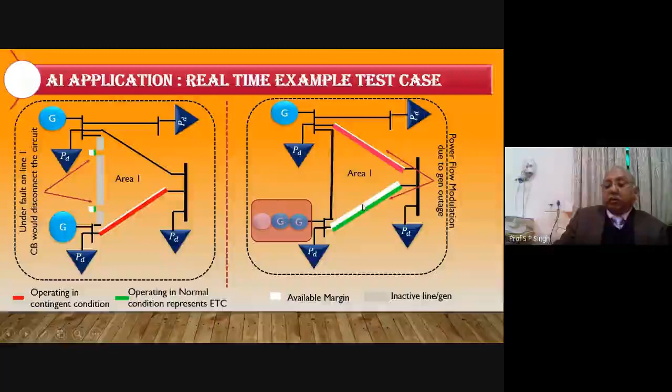Another example: at one of the nodes, the generator connected to this is a windmill whose speed will increase, feeding more power into the network, and this will also cause a change in the power carrying capacity of these lines.

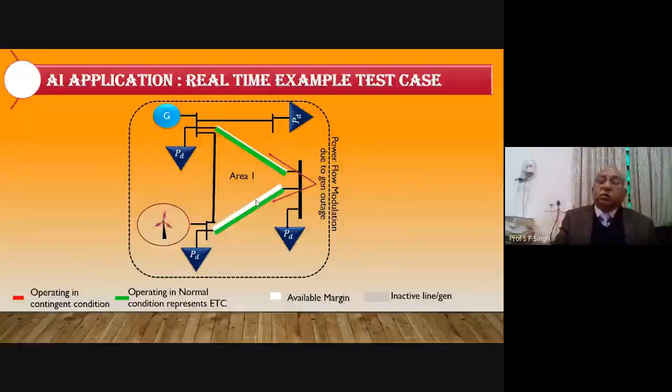And as the power fed by this generator is reduced, the power handling capacity of the lines will change.

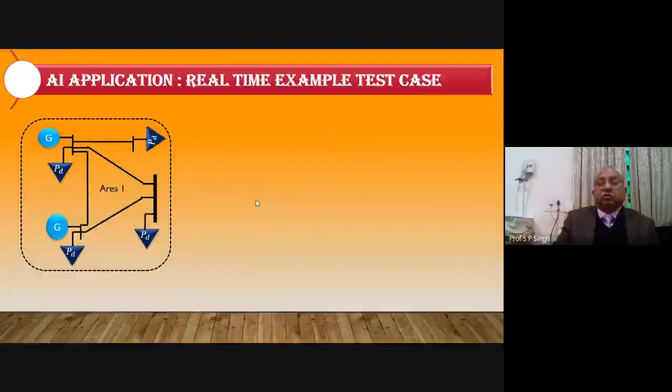This is another example of two areas, where these two areas are connected by two tie lines, and a fault in one of the lines will cause increase in power flow in the other line, leaving little margin for excess power to flow.

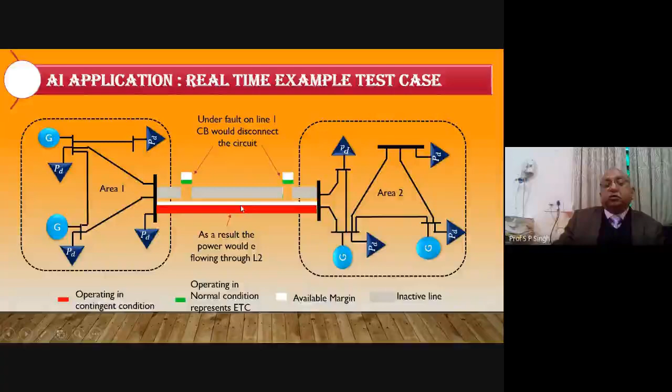So through these examples, I just tried to explain how the present scenario in the system changes, and in this changing scenario, depending upon the type of change, there may be increase or decrease in power due to faulty conditions, generator outage, or if we are using a renewable energy resource where power input goes on changing, toward the upper or lower side, and this will cause a change in power flow in various lines. The operator has to keep watch on this, and if it has to take up any additional load, maybe in a single area case or maybe in the double area case,

it will first decide whether there is enough margin to carry that load or not, and the electricity cost also may change depending upon the time, the capacity of the lines, and the demand of the consumer.

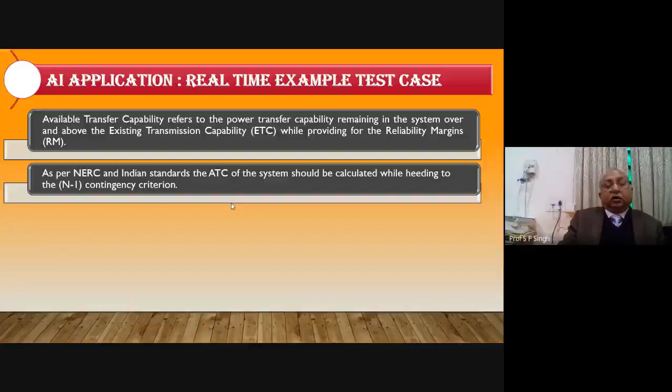This means while defining the ATC, it is considered that even with the power flowing according to the defined contingency, it can sustain an N-1 contingency. That means even if a line goes out, it will carry the amount of power calculated through the ATC evaluation or ATC calculation method.

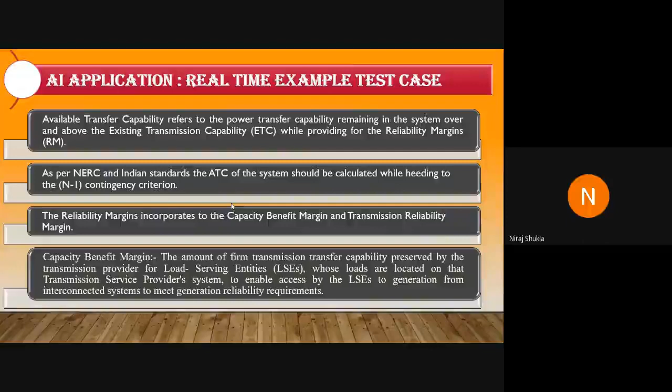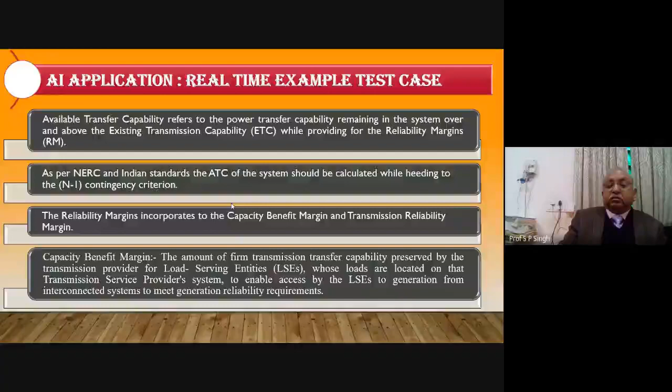The reliability margin incorporates the capacity benefit margin and transmission reliability margin. The capacity benefit margin is defined as the amount of firm transmission transfer capability preserved by the transmission provider for load serving entities, whose loads are located on that transmission service provider's system, to enable access by the LSEs to generation from the interconnected system to meet generation reliability requirements.

Transmission reliability margin is defined as the amount of transmission transfer capability necessary to provide reasonable assurance that the interconnected transmission network will be secure. The TRM, that is transmission reliability margin, accounts for inherent uncertainty in system condition and the need for operating flexibility to ensure reliable system operation as conditions change.

The existing transmission commitment, the first term which was used, includes any combination of native load uses, contingency reservations, the margin or capacity benefit margin, existing commitments for purchase, exchange, delivery, or sales, existing commitments for transmission service, and other pending potential uses of transfer capability.

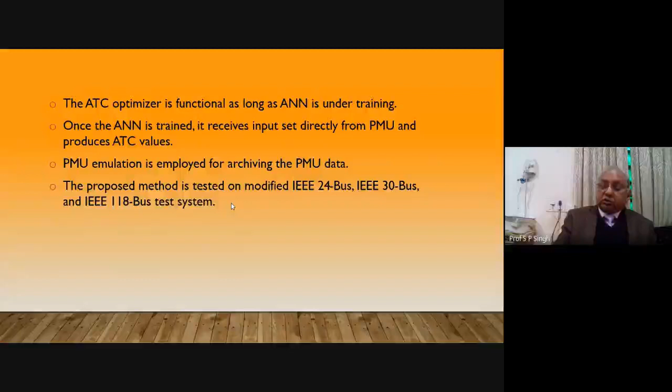The proposed method is tested on modified IEEE 24 bus, IEEE 30 bus, and IEEE 118 bus standard systems. The proposed method has also been implemented on a real-time digital simulator.

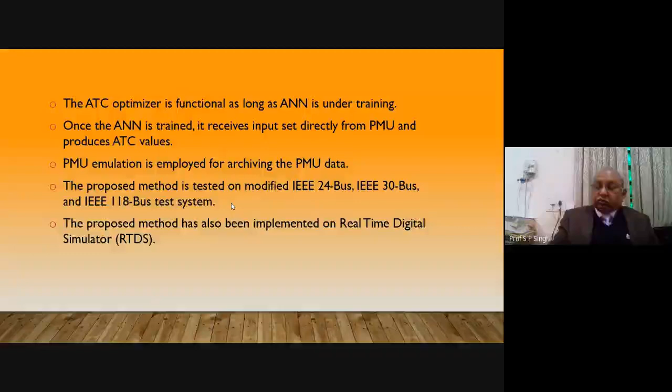A method for real-time estimation of ATC using measurement data from PMU. This is the expected outcome from the considered case study: a PMU emulator for obtaining the data required for training and testing of the ANN-based real-time estimator, and feature extraction for ATC estimation.

The feasibility of real-time applicability of the proposed method has been authenticated by implementation on RTDS.

ATC's definition has already been given: the power that could be delivered in addition to the existing transmission commitment, with due adherence to the transmission reliability margin and capacity benefit margin, has been defined as ATC.

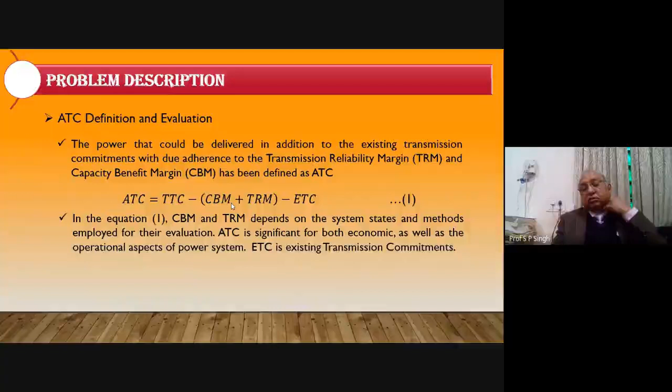ATC is significant for both the economic as well as operational aspects of the power system. The ETC is the existing transmission commitment; whenever you evaluate, the lines may be carrying some amount of power. So over and above whatever the system can carry, transmit, is the available transfer capability.

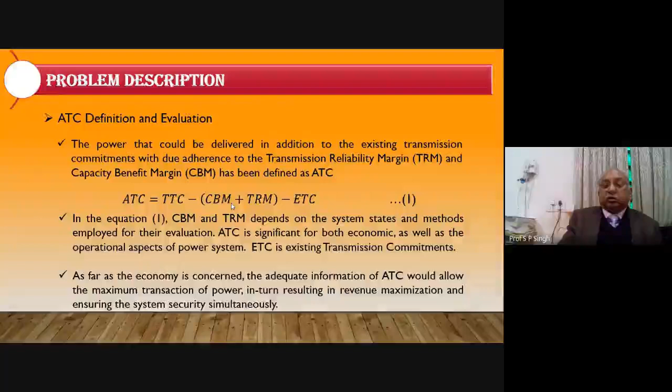As far as the economy is concerned, the adequate information of ATC would allow the maximum transaction of power, in turn resulting in revenue maximization and ensuring system security simultaneously.

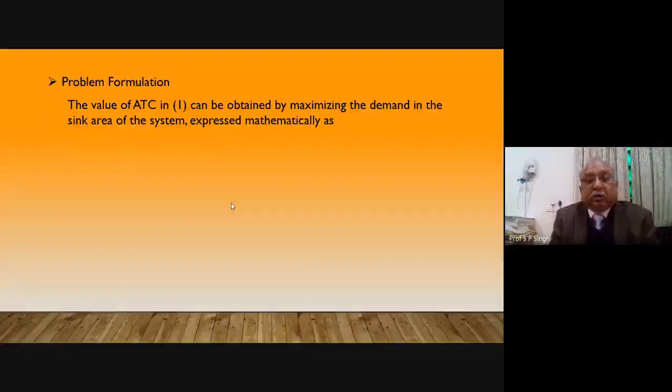The problem which we will attempt in future is formulated as: the value of ATC in equation 1, as already expressed, ATC equals TTC minus the two terms in the bracket minus ETC, can be obtained by maximizing the demand in the sink area of the system, expressed mathematically as follows.

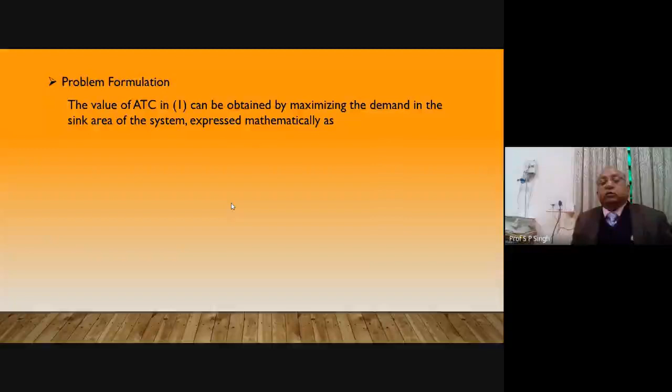F(x) equals the summation of Xi, with i varying from 1 to sink, that is load in the sink area, minus Xi0, that is the load in the beginning. This amounts to maximizing the amount of power that the system can carry, which is mathematically written as the difference between the sink area load in the beginning and during the period it functions. Here, sink is the number of buses in the sink area that take the load, Xi is the load at the ith bus, and Xi0 is the initial load, or base load, at the ith bus.

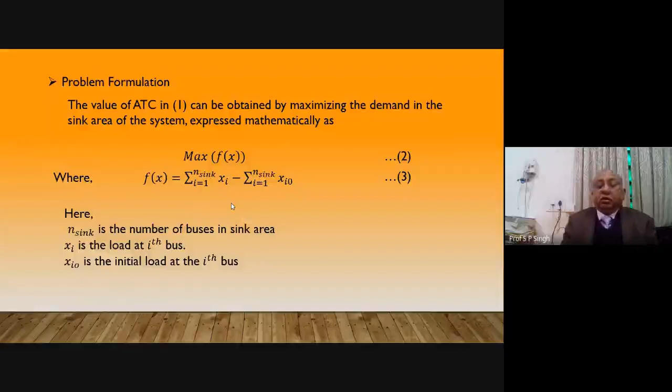The constraints include the equality constraint, that is power balance, where generation minus demand minus losses equals 0. That is about active power. Similarly, for the reactive power, generation minus demand minus losses.

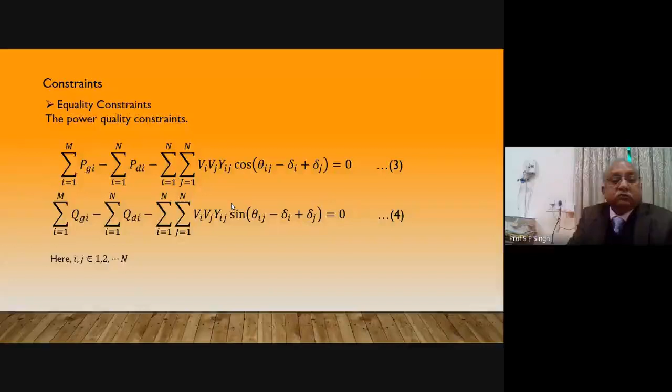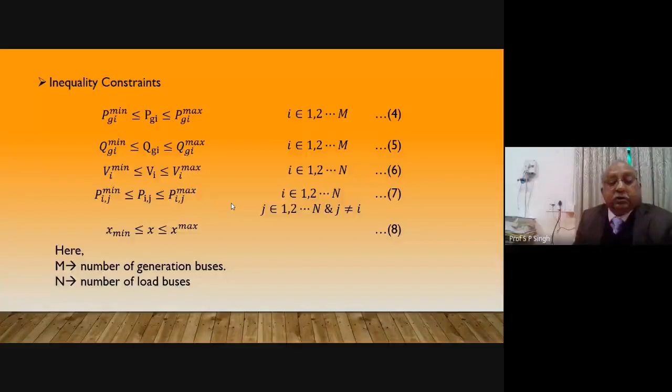Inequality constraints include: the generation at a generator bus should lie between its maximum and minimum limit that it can generate; similarly, the reactive power generation limits, voltage magnitude limits, line flow limits, and the load limits. M is the number of generator buses and N is the number of load buses.

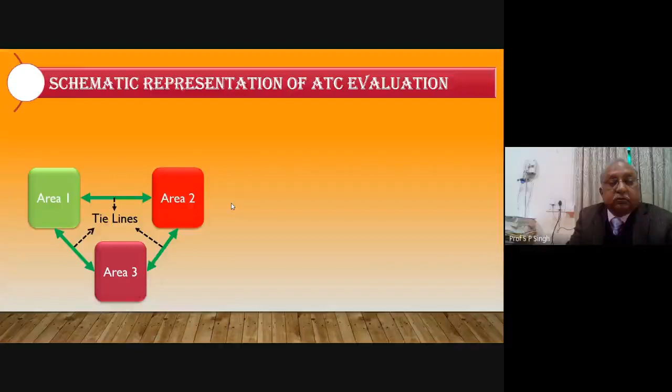Through three area, the power flow from one area to the other area are in general source to sink area is shown over here.

Similarly, when the source is toward the other side and sink is toward its opposite side.

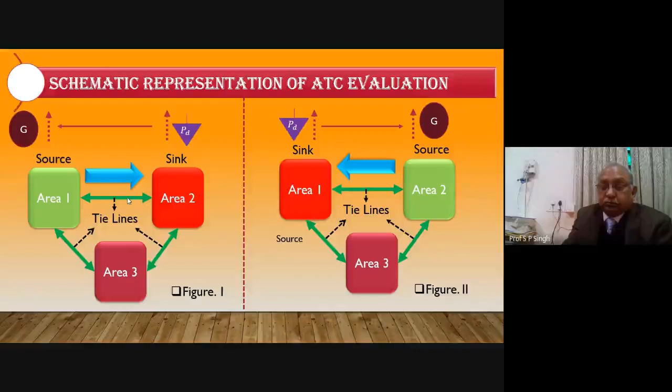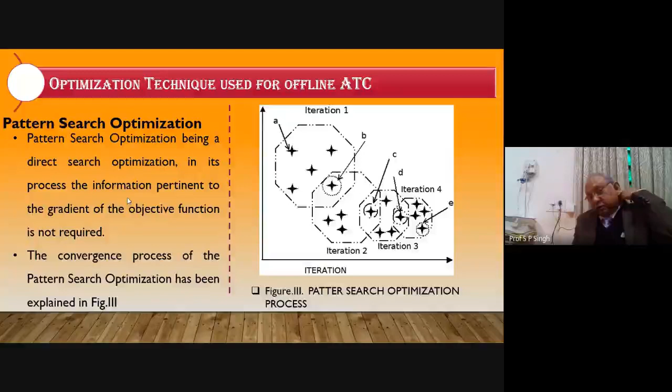This is the pattern search optimization technique which I told you in the beginning. So a lot of measurements are coming from the PMU, and if all are used for the training, it will take a huge amount of training time. To reduce that, the pattern search optimization technique has been used, which extracts the features on which the load depends, and the relation of ATC depends to the maximum extent. That's what was told in the beginning, that the pattern search optimization technique will also be used to sort out the features which strongly define the ATC.

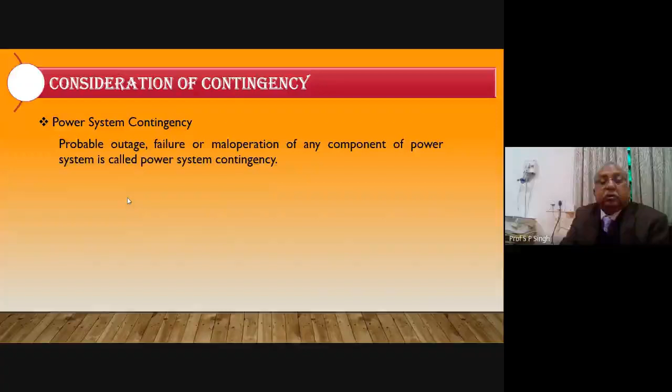Now, consideration of contingency: the probable outage, failure, or mal-operation of any component of power system is called power system contingency. The N-1 criterion for contingency analysis, which I told you that if one of the lines goes out and which line and all that will be tested by the contingency ranking.

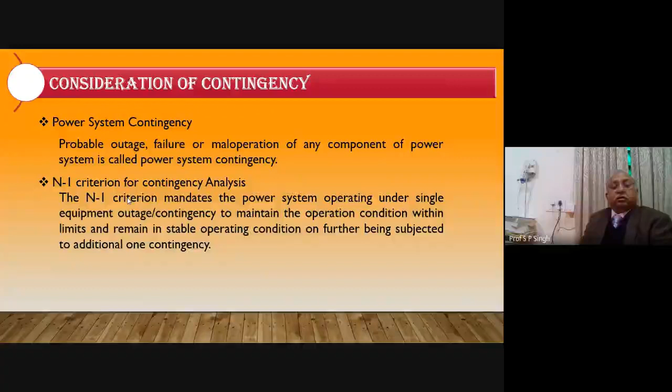So N-1 criterion for contingency analysis mandates the power system operating under single equipment contingency to maintain the operation condition within limits and maintains the stable operating conditions, further subjected to an additional one contingency.

Incorporation of contingency during ATC evaluation. To ensure proper operation, it is essential to consider the contingency while evaluating ATC of the system. So thus the ATC for any transaction is evaluated for any system such that in the event of the occurrence of the contingency, N-1 of the system remains within their operational limits.

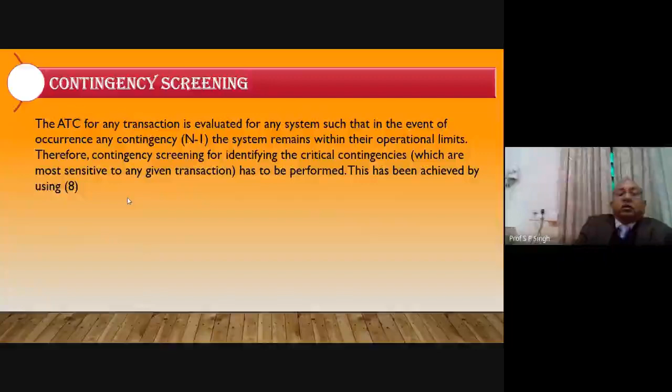All the contingencies are ranked in the priority order of priority or severity. Suppose a contingency is most severe based on its ranking, meaning if this contingency happens, the other contingencies will cause less severeness to the system. So if the system survives the most severe contingency, the operator knows it will definitely survive the others. As a result, contingency screening is done in the beginning and the system is studied for the most severe one. If it survives, there is no need of studying the effect of all the contingencies. That is what the screening means.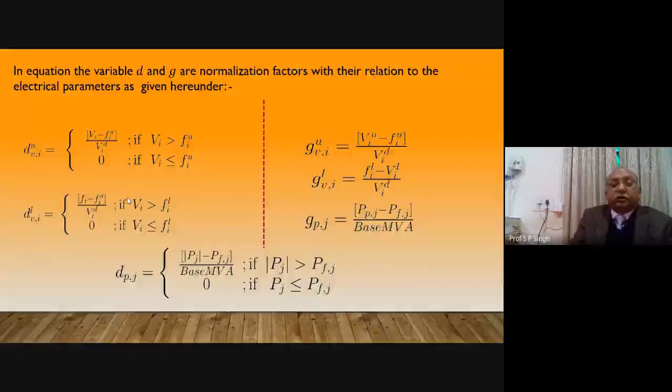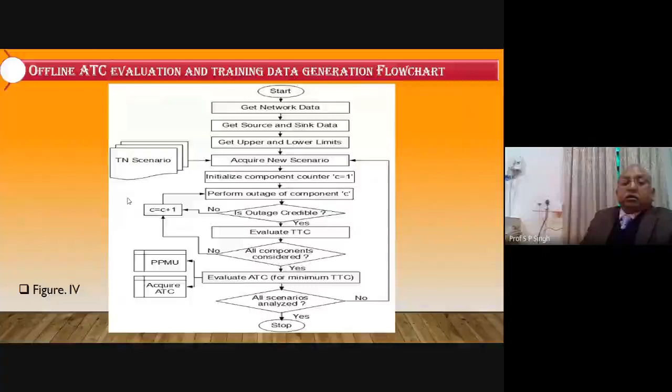Where the individual terms in the bracket are defined here, and the system and the line for which it is lower than the top one. So this ranking is obtained in the beginning before actually the contingency analysis is carried out, and this is to evaluate the contingency, taking care of all the cases.

The data of ATC for varying scenarios have been archived by the pseudo PMU emulator. Actually, the method used over here is a simulated PMU called the pseudo PMU emulator, for which the method has been developed by one of the PhD students, Mr. Devesh Shukla, and this work has already been published in IET GTD.

So now, the figure shows how the data is created for ATC evaluation, and the input data from the PMU emulator is obtained, and the network solver finds out the value of ATC using the formula which was explained earlier. So corresponding to all the scenarios using the relation which I told you has already been given over here, and its implementation in a flowchart manner is given in figure 4.

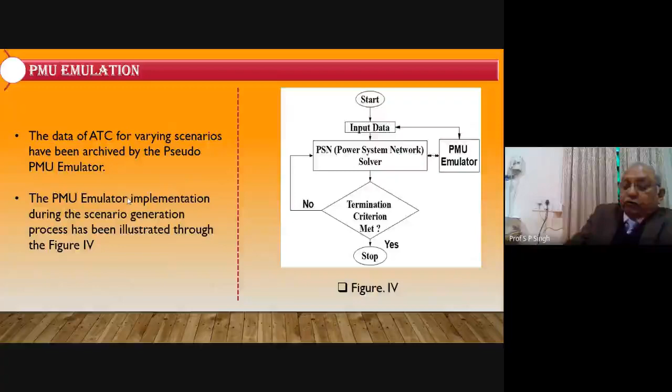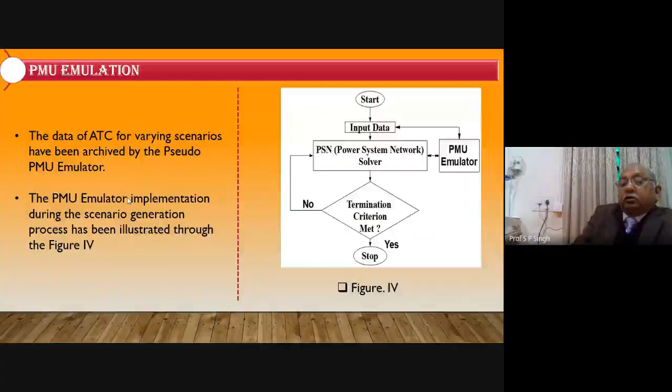So the information given to the PMU, or the input information to the network solver, is branch connectivity, voltage data, and the current data. And based on that, the current magnitude and its angle at the branch, and the voltage magnitude and angle, these information are obtained by PMU.

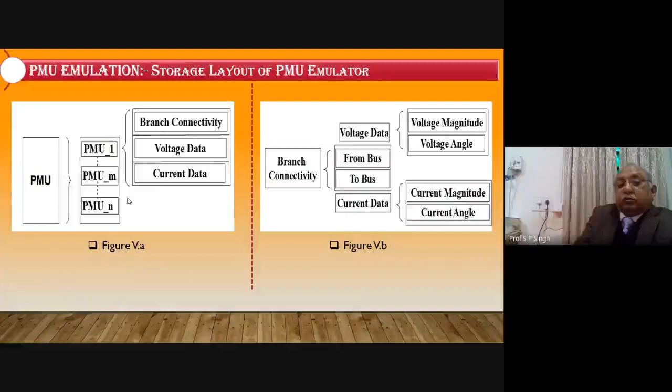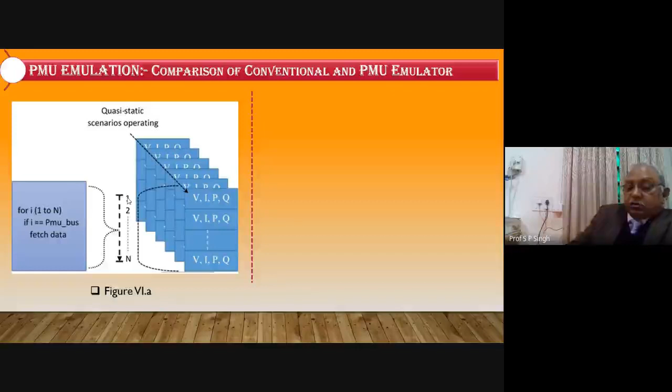And these are the information VIPQ, which is measured by PMU, is shown in the slide over here, for which the quasi-static operating scenario has been created, from which the PMU measurement is recorded, and using this PMU data, the neural network is trained.

Now to demonstrate that the pseudo PMU emulation and the actual power flow run using gradient technique, the time taken is same or more or less. You can see that the time taken by the PMU emulation is minimum compared to the gradient or iterative algorithm.

As far as speed is concerned, the PMU, that is pseudo PMU, has given faster results compared to any conventional technique. So one can adapt the PPMU based measurement. Linear state estimator has been used for the online application, which if I go into, we may not be able to complete the information, so I will discard it here.

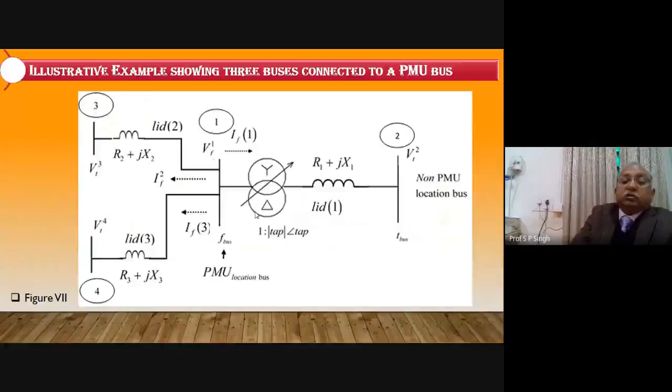This is the system actually used. Neural network has been used to train the network, and you may be knowing about the radial basis function network, where neurons are used in the hidden layer, one layer is the input layer, and linear neurons are used in the output layer.

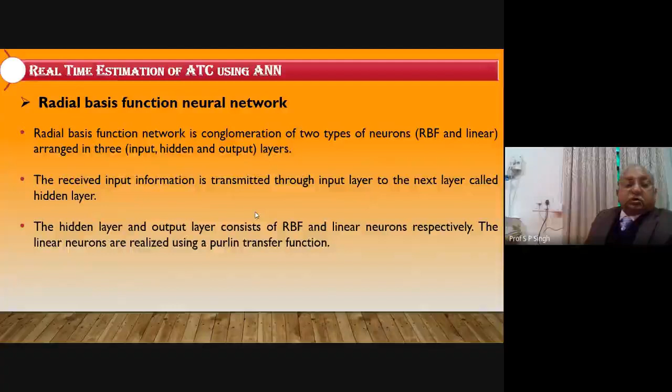Each layer consists of several nodes which are fully connected, and the relevant predecessor and successor use the succeeding layer. Now, Moore-Penrose generalized pseudo-inverse method is utilized to obtain the weight between the hidden and the output layer.

Why this Moore-Penrose method? Because for the RBF neuron and the output neuron, the number of RBF neurons is not a problem, but between the hidden neuron and the output neuron, the matrix formed is a rectangular matrix.

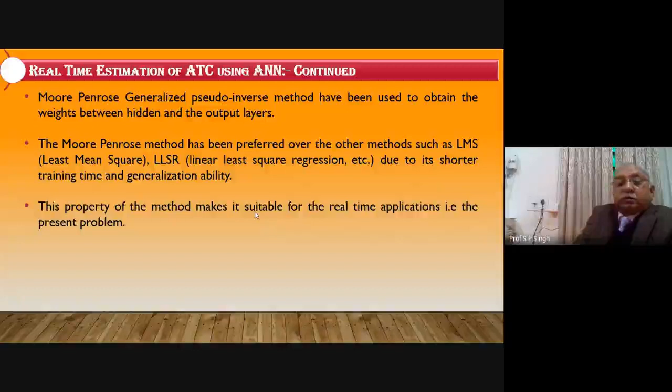So this is for calculating the inverse of the output neuron and hidden neuron matrix. The Moore-Penrose method has been preferred over other methods such as LMS least mean square and linear least square regression etc., due to its shorter training time and generalized abilities. The property of the method makes it suitable for real-time application, which is the present problem.

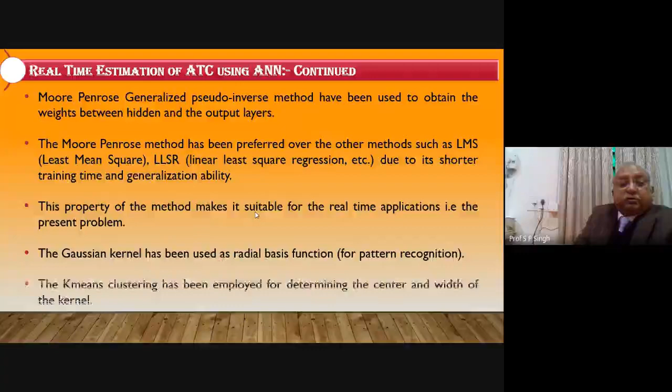The Gaussian kernel has been used for the radial basis function. K-means clustering has been employed for determining the center and width of the kernel. This is the common practice. Still, the Gaussian kernel is used for this purpose.

So during the training, the ATC values are to be evaluated using the formula given in relation 8. And once the neural networks are trained, the PMU data is inputted to the neural network, and with the trained information, whatever output the output neuron produces is accepted as the output of the system.

The input to the network mainly consists of 4 different types of data: voltage magnitude and angle of the buses at which the PMUs are located. Now, here I want to mention that we have not assumed PMU to be present at all the nodes. The PMU locations have been taken on the basis of an optimal PMU placement method. I have mentioned in the beginning that it is tested on IEEE 24 bus, 30 bus, and 118 bus.

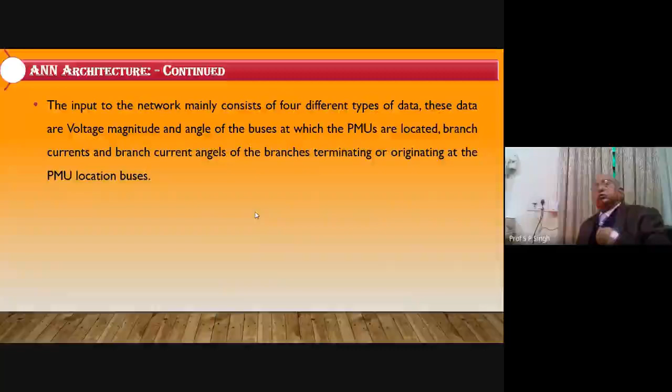For all these buses, wherever PMU placement was achieved using an optimal PMU placement method, that method was also developed by one of our students, Satyan Pratap Singh. This work is also published in IET GTD. So the same location was assumed, and we assume that the PMU is placed at that location, and whatever measurement comes from those locations is used.

And since those locations have been decided considering that the complete system is observable, from that point of view, it is assured that the data obtained is sufficient enough to give the information about the entire system.

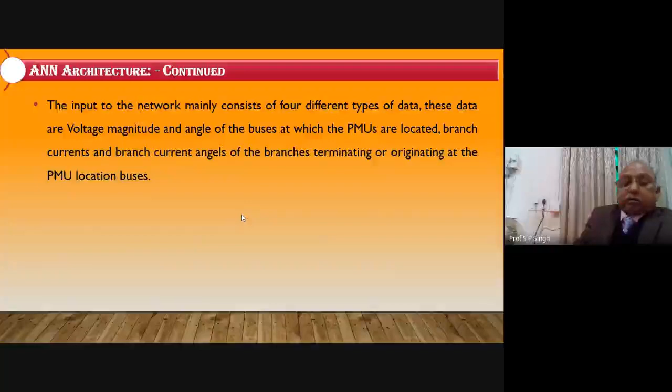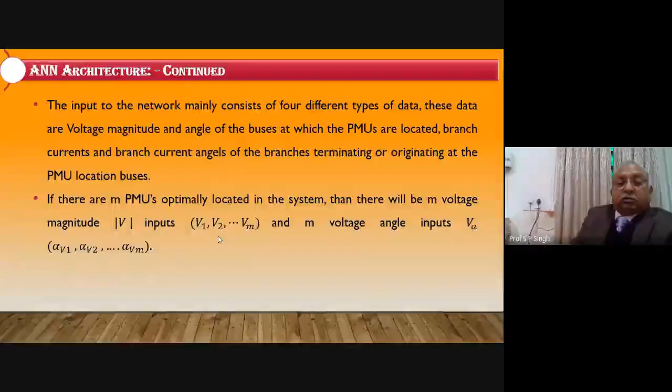If there are M PMUs optimally located in the system, then there will be M voltage magnitude and M voltage angle. Similarly, if there are R branches terminating or originating at the ith PMU bus, then the branch current is also an input. The size of the input vector would be 2 into M plus 2Ri, where i varies from 1 to M.

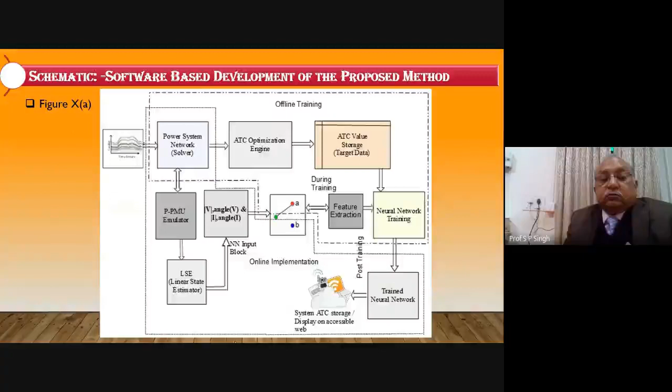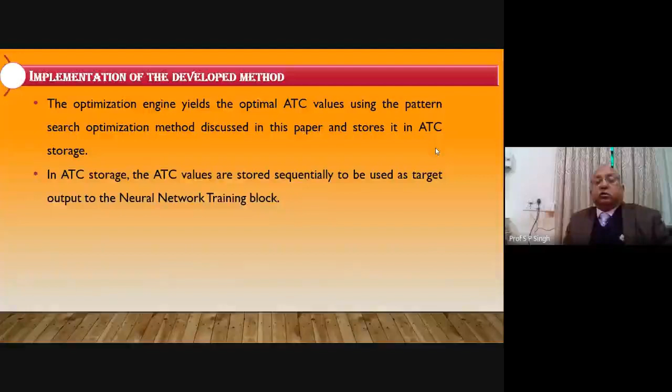The optimization engine computes the optimal ATC value using pattern search optimization method and stores the ATC. The ATC values are stored sequentially to be used as a target output for ANN, which I have already explained. Concurrently, the PMU emulator interacts with the PSN solver to archive the voltage, current, and PMU location buses.

This is just to mimic the synchronized information as in actual practice is obtained. This is depicted by placing a switch at what I have already explained, switch A and B's location. Once the network is trained...

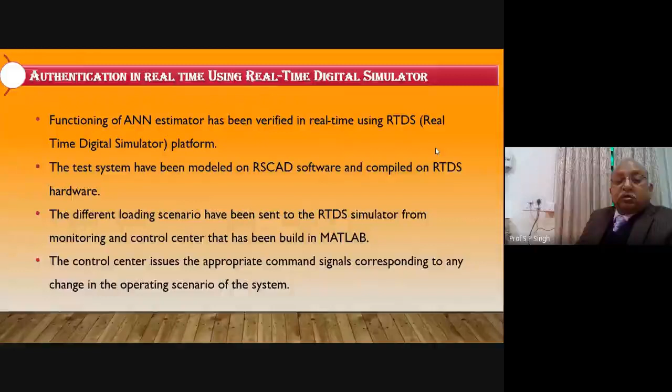The different loading scenarios have been sent to the RTDS simulator from the monitoring and control center that has been built in MATLAB. The control center issues the appropriate command signal corresponding to any change in operating scenario, maybe change in load, maybe change in generation, increase or decrease, that is sent to the control center.

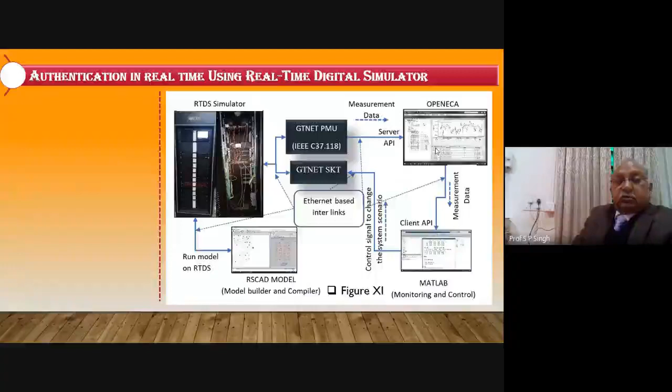This is the entire diagram, the complete diagram for the real-time digital simulation. Here is your real-time digital simulator. This is the front panel and this is the back panel connection of various wires where the actual system simulation takes place in RSCAD.

And this one is the MATLAB for monitoring and control. So monitoring and control signals are issued from this MATLAB. So we have two computers, one here and the other one here. And the measured data are coming from this Open ECA software through this one.

And your RSCAD, the RSCAD, sends the information to your RTDS from where the GTNet and SKT - GTNet stands for Giga Transceiver Network and SKT stands for Socket - so this protocol is used to send the signal from the real-time simulator to the real world.

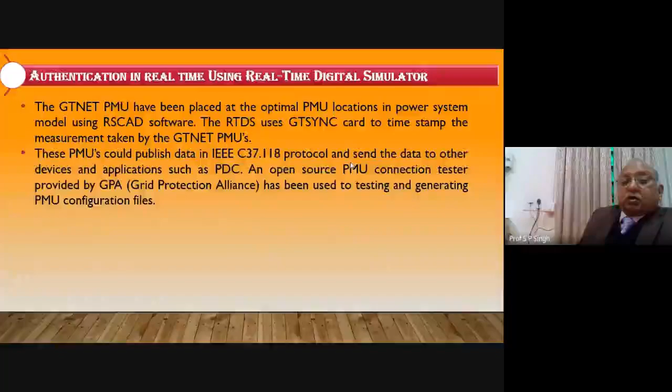The PMUs could publish data in IEEE C37.118 protocol and send the data to other devices and applications such as PDC, and the open source PMU connection tester provided by GPA, Grid Protection Alliance, has been used for testing and generating PMU configuration files.

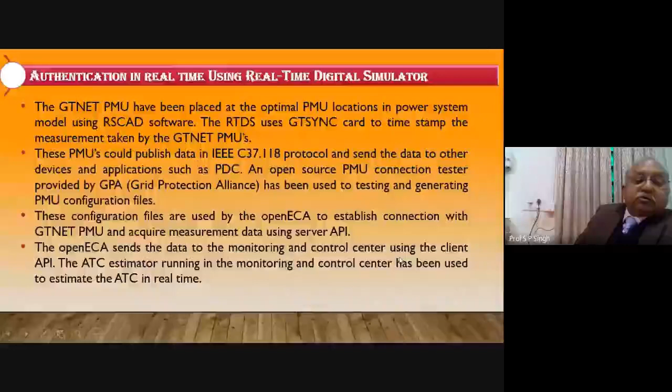The Open ECA sends the data to the monitoring control center using the client API. The ATC estimator running in the monitoring and control center has been used to estimate the ATC in real time.

Case study: the method proposed in the paper has been simulated on a Core i7 computer. The real-time implementation employs the RTDS simulator.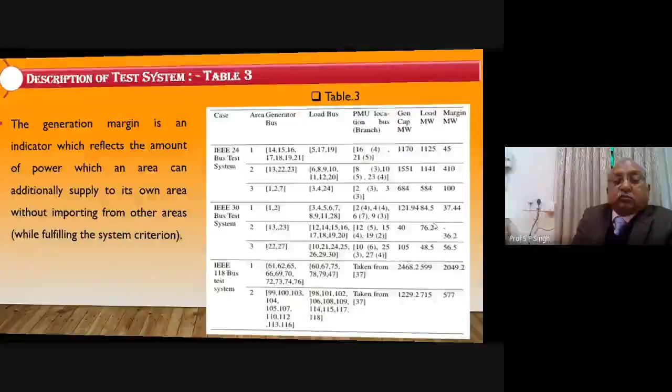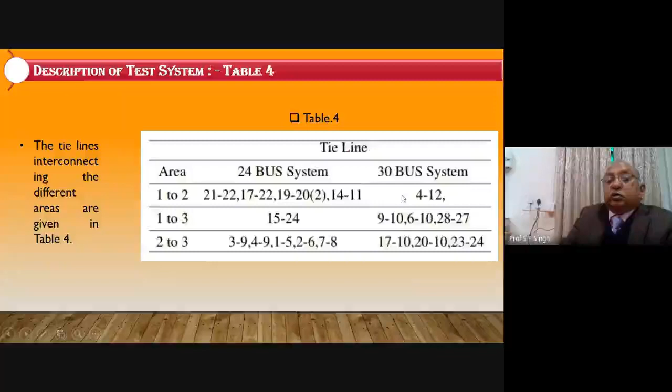For the 24 bus and 30 bus systems, the tie line flows from various areas are given. Still time is there. For every input scenario - load, generation, network topology and PMU location - different values of TTC, total transfer capability, corresponding to various contingencies have been obtained and calculated.

These TTC values correspond to the minimum of voltage stability and thermal limits. The total TTC has been calculated. On this basis, the TTC value corresponding to the most severe contingency would be lowest, for a defined credible set of contingencies.

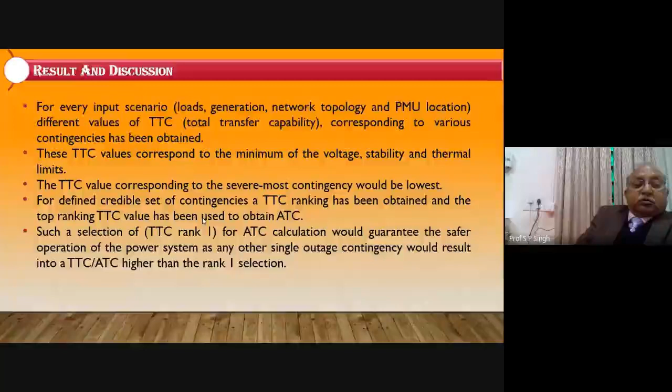Such a selection of TTC rank 1 for ATC calculation would guarantee safer operation of the power system, as any other single outage contingency would result in TTC and ATC higher than the rank 1 selection. So rank 1 - the value of TTC and ATC - has already been tested for top rank ATC.

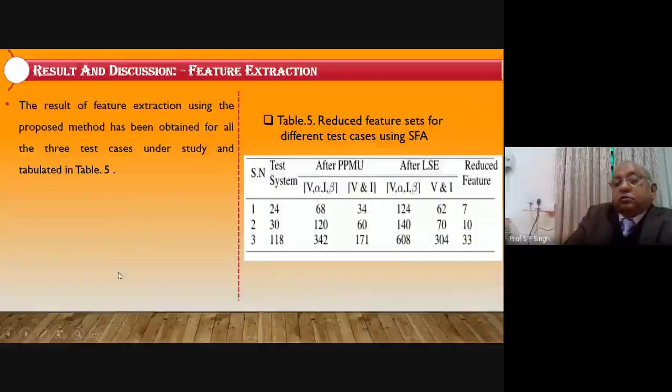There are three systems of PMU readings. SFA has been used to reduce the size of the input feature.

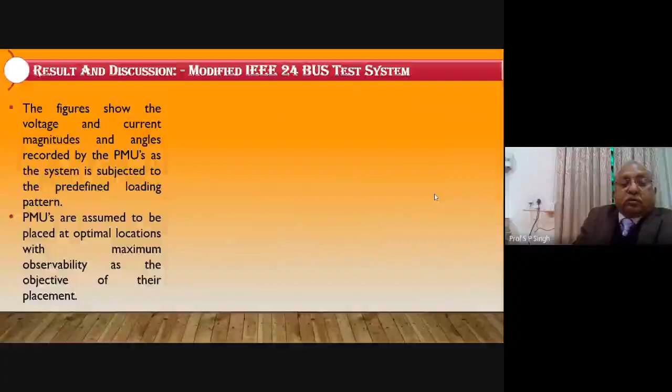These are the ATC values from transaction A1 to A2 for the 24 bus system, which was listed in the table.

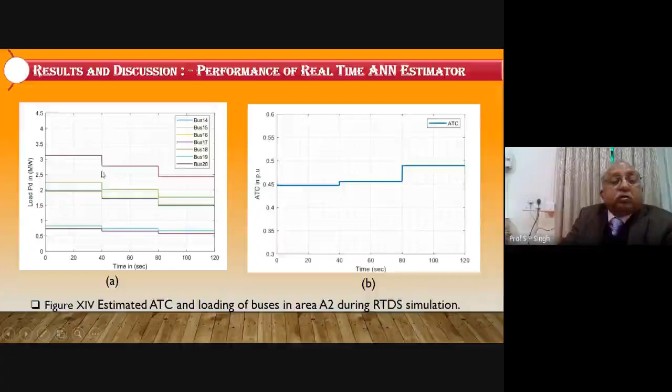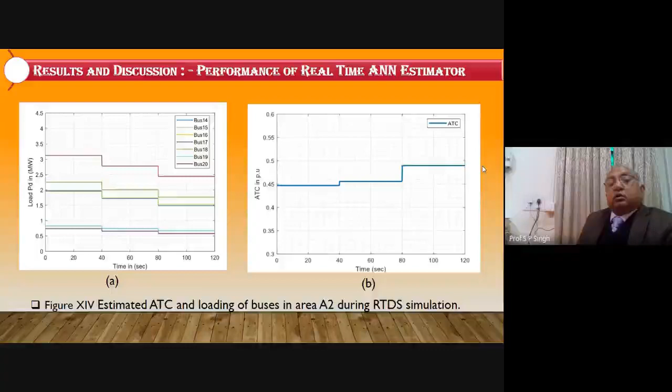During this period and that period, to the end, you can see how the ATC value has increased because of the decrease in load at various intervals at various buses by different amounts. After the first decrement, it's at this value; after the second decrement, it has gone to this value; and the third, it has gone to this value. So the real-time digital simulator has very clearly demonstrated the change in ATC value as the system load changed.

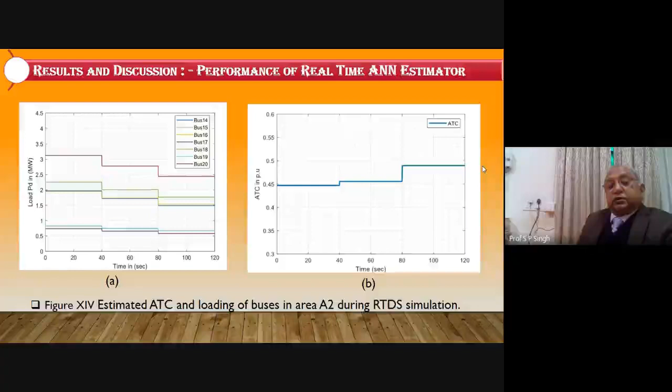So to conclude, a framework for real-time ATC estimation using ANN has been presented with its application on the IEEE 24 bus test system, and an ATC optimization engine applying the proposed method for estimation of ATC has been used for obtaining the ATC training data in the offline stage of real-time estimator development.

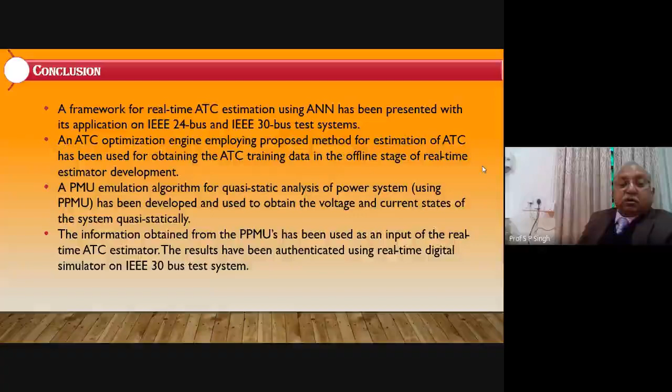A PMU emulation algorithm for quasi-static analysis of the power system using a pseudo PMU has been employed to obtain the voltage and current states of the system. The information obtained from the PPMU has been used as an input of the real-time ATC estimator. The results have been authenticated using real-time digital simulation of the IEEE 30 bus test system.

Now, if you have any queries - I chose this topic because PMU was used for ATC calculation, and in real-time simulation, without a communication protocol, the data transfer of various control signals or control instructions cannot be transferred to the actual system where it is being applied.